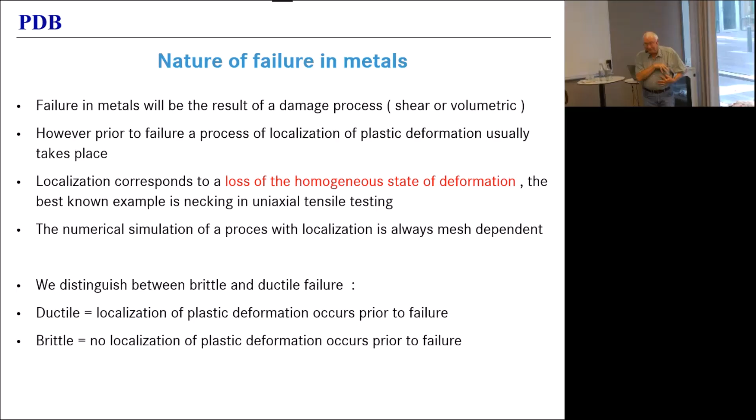80% of the problems you're going to have in your life are battery related. Not saying we should get rid of batteries. I didn't say that. Where was I?

Failure in metals will always be the result of some damage process. But prior to that failure, we will usually see a process of localization of plastic deformation. That means we lose the homogeneous state of deformation; we localize plastic deformation in a small area. And that localization, when we simulate it, will inevitably be mesh dependent, which is why we need regularization.

Now, we usually distinguish between brittle and ductile failure. Ductile failure means that you localize prior to failure, and that means you will have to regularize. Brittle failure, in my terminology, is that there is no localization prior to failure. So you break before your neck, and then there is no need for regularization. Now, the important thing we're going to try to convey today is that brittle and ductile are not material properties. Any material is brittle and ductile depending on the state of stress to which it is subjected, and it will have to be treated accordingly.

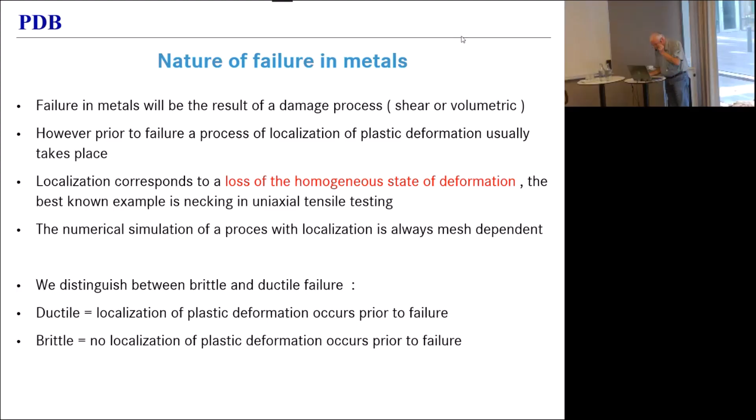So what happens when we localize? Well, when we localize, there is inevitably what I call an instability. You see a negative slope in the force displacement curve, so you get a negative stiffness. I call that an instability, not everybody does.

So there are two different kinds, because the force is equal to the true stress times the cross-section. You can either have an increasing true stress with displacement and a decreasing cross-section — that's what we call a structural instability. Or you can have the reverse: an increasing or constant cross-section with a decreasing true stress, which is a softening, and that would be a material instability. An example of the first is necking. An example of the second is a shear band.

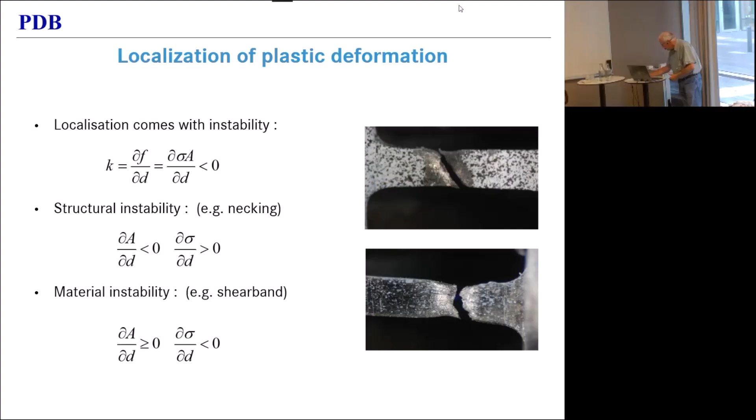Now, not everybody calls it instability. If we look at necking, and in particular diffuse necking in a metal, people will usually identify that with a loss of uniqueness. And clearly, if you look at the force displacement curve for a tensile test on a piece of steel, the necking starts at the maximum. Once you are beyond necking, for a given force you match two displacements, so you lose the uniqueness of your solution. At the very minimum, when you do an implicit solution, that may cause problems.

Now, the term instability will often be reserved for material instabilities, and that could be adiabatic shear bands, PLC effects, material softening — it could be many things. I don't distinguish. Loss of uniqueness is bad enough. The point is, you become mesh dependent. So it's very important to know when it starts.

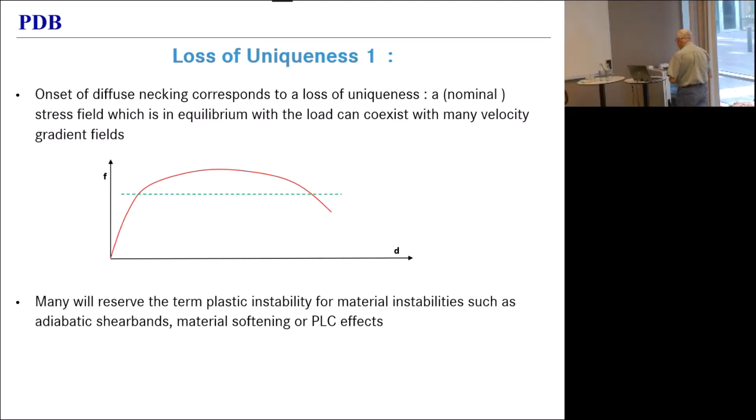Well, if you have a very nasty, difficult question, you can always ask Sir Rodney Hill, or at least you could, as long as he was alive. If you go back to the literature, in 1956 he published a paper which actually gives a mathematical criterion for the onset of localization of plastic strain, which he identified with the loss of uniqueness of the mechanical problem. But if you look at the formulas there's an integral, and that integral goes over the entire domain. So it's a global criterion that depends on the material law, on the boundary conditions, and on the geometry of your structure.

It's not something that you can evaluate at the level of the integration point, so for implementation in a code, it's maybe not very practical. Now, note that he published that paper in 1956 — that's the year I was born. That's why I didn't read it. I was too young.

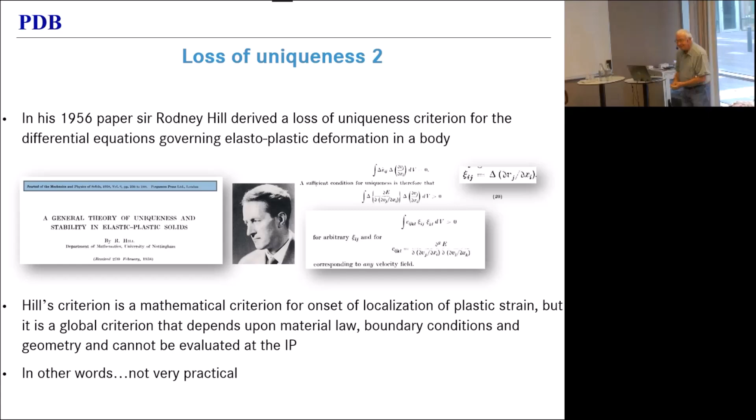Let's focus on necking a little bit. What is going on in a piece of steel that we subject to a tensile test? Well, you can actually distinguish four phases. Initially, you have homogeneous deformation. Then you have what we call diffuse necking, which is essentially a reduction in width of the sample. And then you have localized necking, which is what metal forming people are interested in, where you get extreme thinning in a narrow, skewed band through the sample.

That will then ultimately lead to fracture. Now, the criterion for the onset of diffuse necking has been known since 1885. It was Considère who identified it with the maximum of the force displacement curve, or to put it differently, the maximum of the engineering stress, engineering strain curve. Again, Rodney Hill identified the start of localized necking as the point where the second principal strain stops growing as the first principal strain is further increased. At that point, the only thing your material can do is thin, and obviously the process accelerates very rapidly from there on.

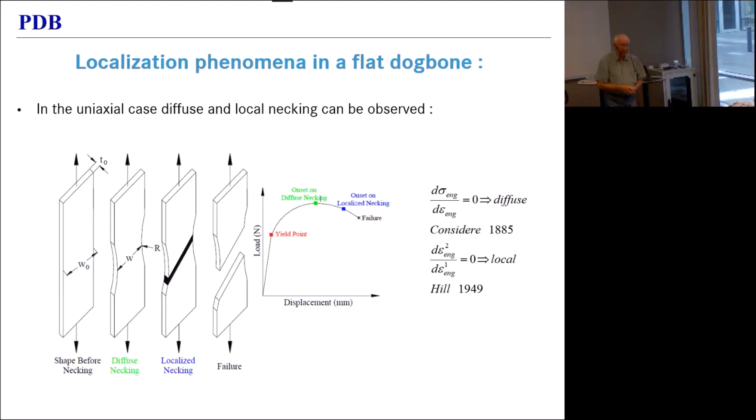Now we can look at that in terms of yield curves. The condition that you have a maximum in the force displacement curve is the same as saying that the tangent modulus is equal to the true stress.

If we then neglect the elastic strains, we can say for metals with a good approximation that diffuse necking starts when the hardening modulus, the derivative of the yield stress with respect to the equivalent plastic strain, becomes equal to the yield strength. And if you then throw a very simple equation at the yield curve, like the Ludwik equation,

yield stress is equal to K equivalent plastic strain to the power of N, and you do two lines of algebra, you find that diffuse necking starts for an equivalent plastic strain equal to N, N being the hardening exponent. Now, with an additional two more lines of algebra, you find that local necking starts at 2N. So it's quite far away.

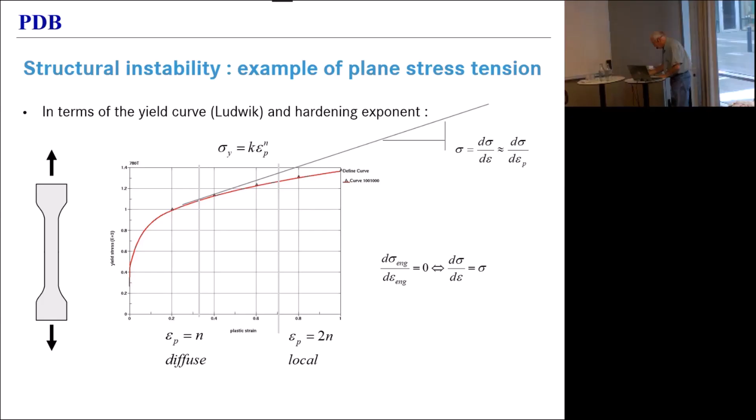A little bit more of a closer look at that, because it's all important in the end in terms of states of stress. As long as we have uniform deformation, we have a uniaxial state of stress, and we could actually easily simulate a tensile test with a single element. But then when we start necking, our state of stress changes.

It becomes two-dimensional, and at that point we need a shell mesh to adequately model what is going on. Finally, when we have local necking, we not only have width gradients in the sample, which cause a transversal stress, but we also have thickness gradients, which cause the stress in the thickness direction. So at that point, the problem becomes three-dimensional, and we theoretically need solids to model it.

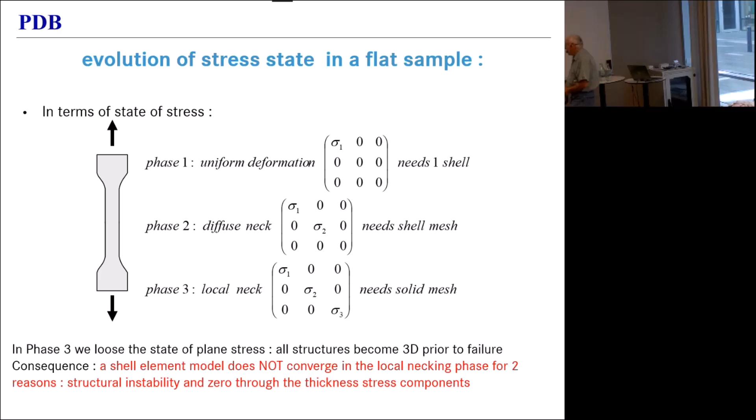Well, that's all very good. We don't do that in practice. We use shells. But that, of course, contributes to the problem of mesh dependency, because once we start to see a local neck, we not only see mesh dependency, but we enhance the localization because there is a component of the resistance of the material, the through-thickness stress, that is missing in our model. Now, that's not a cause of the issue, it just makes it worse.

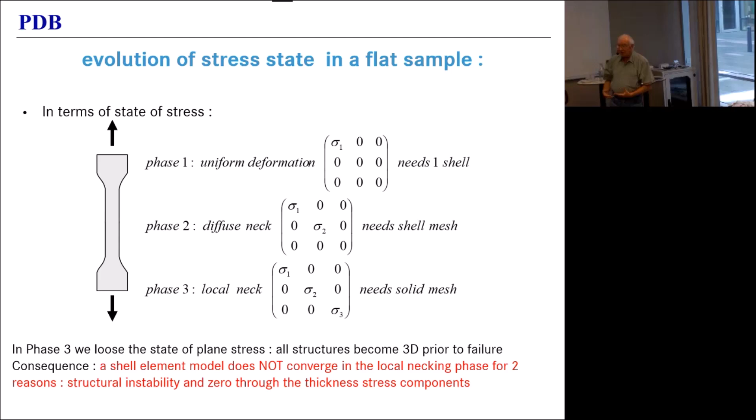So I now come to mesh dependence. I apologize for the simplicity of this example, but I have to make sure I get rid of the last bit of doubt about the fact that there is mesh dependency once you reach diffuse necking.

Imagine the extremely simplified case of a rigid, perfectly plastic material. So you have a Young's modulus that goes to infinity, and you have a constant yield stress. When do we start necking here? For which plastic strain do we start necking? Well, it's immediate. You start at 0 because your hardening modulus, which is 0, is smaller than your yield strength. And that happens immediately. So the moment you load, you're going to localize.

This case is actually so extreme that you can try it out in OpenRadioss if you don't believe me. But all the plastic strain will localize in a single element.

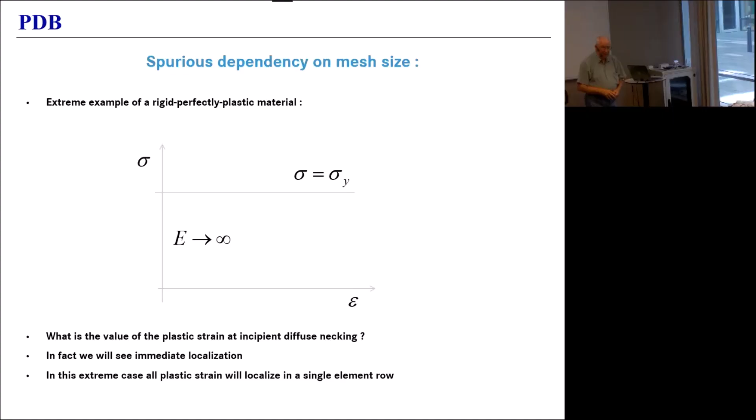Now let's assume that I can put my hands on some of that material and I do a tensile test on it. And I have a sample with an initial length L0, and a final length L at which that sample fractures. And now let's assume that I'm a professor at Chalmers, which I'm not, but we will assume that for just a moment. And I asked one of my students to work out the strain to failure, knowing the final length of the sample when it fails.

And the first student I ask is not the most studious. He models my sample with 2 elements. All the strain localizes in one of the 2. He looks at the maximum strain, which is in this element, and that strain is the logarithm of the final length of that element, which is the final length of the sample minus half the initial length of the sample, for the other element, divided by the initial length of the element, which is the initial length of the sample divided by 2. And he says, here is your answer.

So I'm not convinced. I ask a second student. He likes work more. He puts 4 elements. And he comes with a completely different answer.

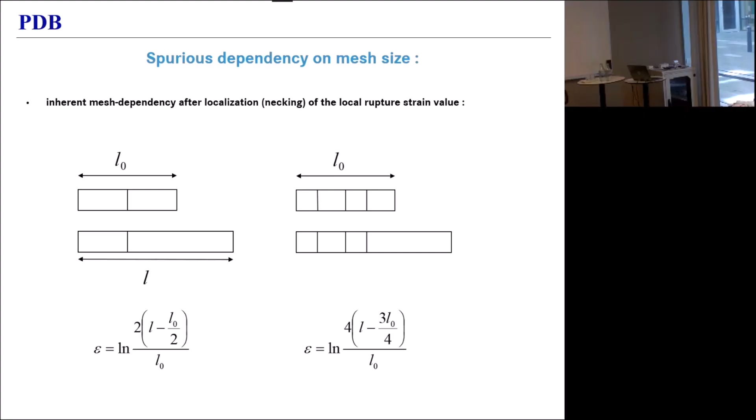Because once again, all the plastic strain, and there is no elastic strain, concentrates in a single element. So the strain in that element is the final length of the sample minus what is left in the other 2, which is 3/4 of the initial length, divided by the initial length of that critical element, which is the initial length of the sample divided by 4. Completely different number.

In general, if I have n elements over the length, I get that formula for the strain in the right upper corner. And there is no way that you can eliminate n from that formula.

But what you can do is reformulate the whole thing. You can say you have a global strain, which is the logarithm of the final length of the sample over the initial length of the sample, or the logarithm of the displacement over the initial length of the sample plus 1. And you have a local failure strain for which we have the formula in the right upper corner. Now I can get rid of n by replacing it with the element characteristic length, which is the length of the sample divided by n, the number of elements used for discretization. Then the local strain is the logarithm of displacement over element length plus 1, sample length, element length.

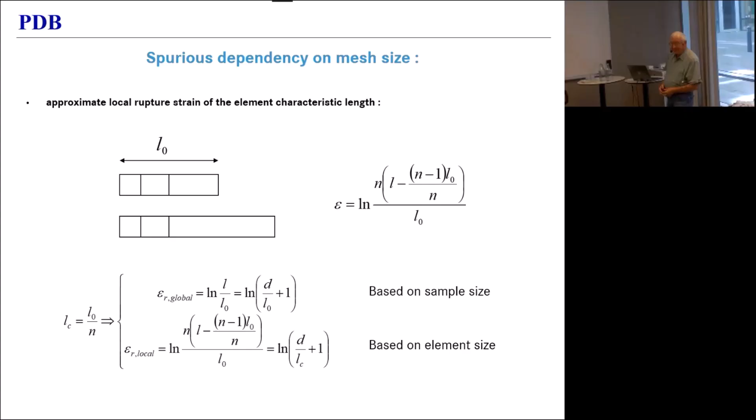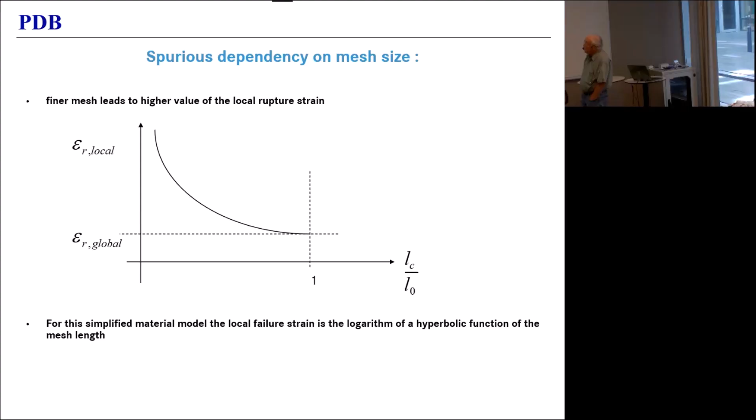It's extremely simple in this case because I'm using an extremely idealized material law. If you work it out, you get a regularization curve, a failure strain in function of the element size. For this very simple example, that regularization curve is a logarithm of a hyperbolic function of the mesh length. For real material laws, it will be something else, and you cannot derive it as simply as I just did. You'll have to determine it by simulation, step by step. But the principle is not different.

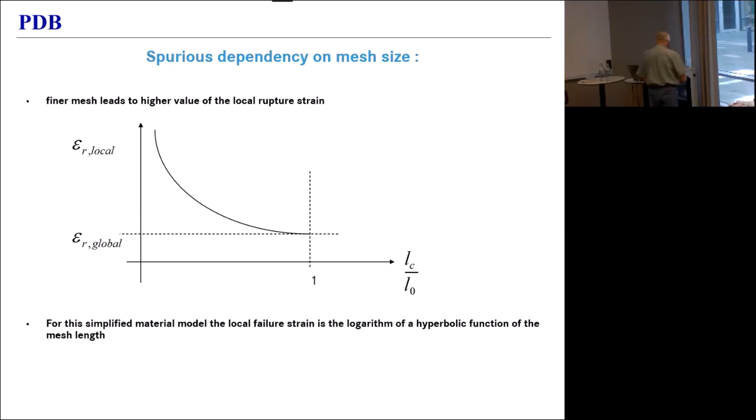This is the reason we absolutely need regularization when doing real applications, because your mesh in a real-life model is never homogeneous—you always have a mixture of small and larger elements. Without regularization, the failure pattern will actually be dominated by the local element size rather than by the physics.

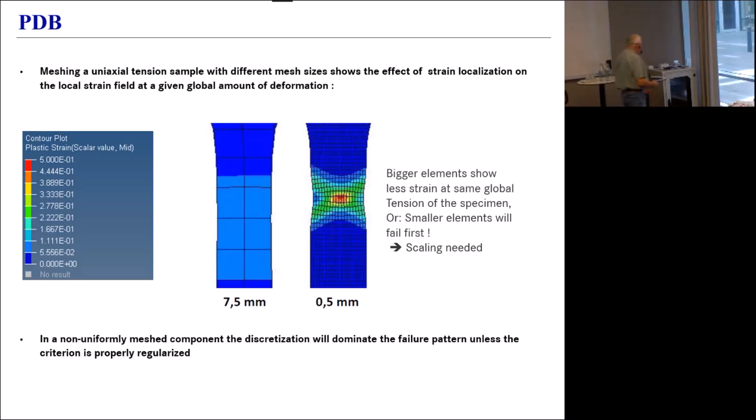So we did an example on Usibor 1500. We modeled a typical tensile test. Marian generated a biquad failure criterion and determined a regularization curve, basically a scale factor applied to the failure curve, where the failure curve is a function of triaxiality. That scale factor is 1 for a mesh length of 1, which happened to be the mesh size for which the material model was validated. As the mesh size becomes larger, we have to bring that scale factor down—and not just by a little bit. It goes down by about 30% in this moderately severe example.

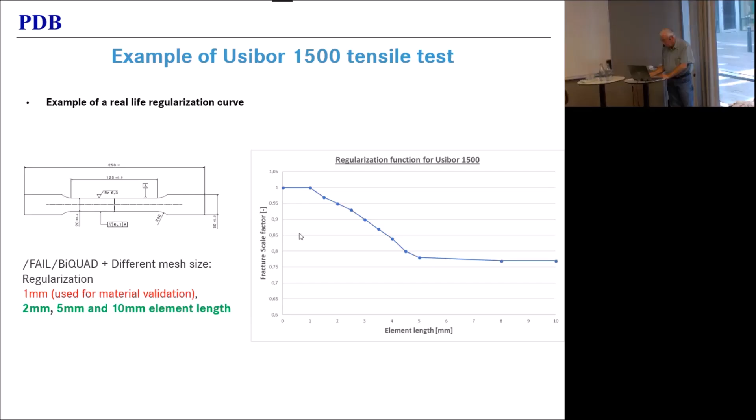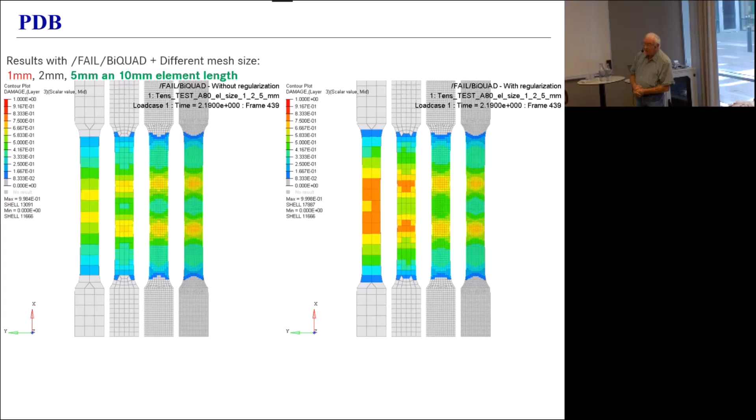We can take the time to look at the video. It's run with mesh sizes of 1, 2, 5, and 10 millimeters. There is regularization on the right-hand side—you will see them all fail at the same time. There is no regularization on the left-hand side—you will see them fail sequentially from left to right. The coarser the mesh, the later it fails.

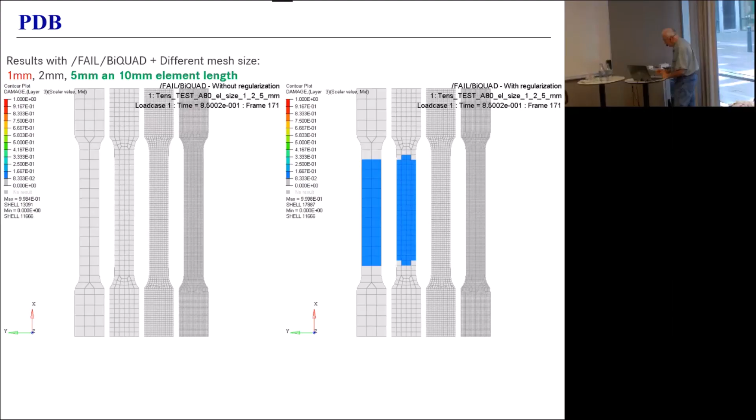We have some snapshots to confirm that. You see the initial failure here. With a 1 millimeter mesh, they are simultaneous—it doesn't matter whether you have regularization or not. With regularization, all meshes fail almost simultaneously. Without regularization, after the 1 millimeter comes the 2, quite a bit later comes the 5 millimeter mesh, and finally the 10.

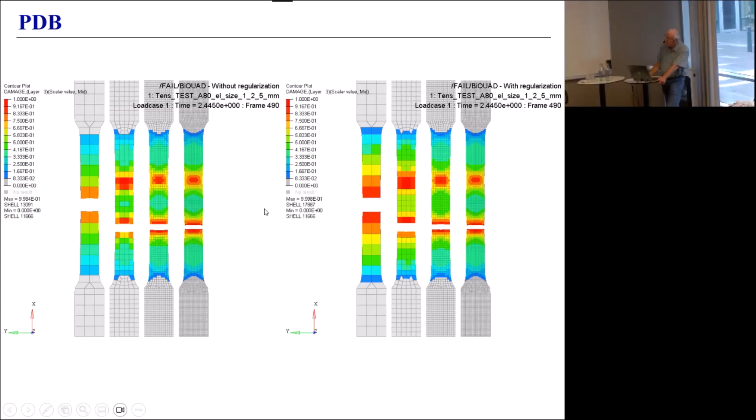What we regularize is the displacement at failure. You could choose to regularize many other quantities—you could focus on energy, or whatever. Obviously, the best would be if you could regularize the entire load path. There are methodologies that do that, but they require a bit more effort from the user than what I just showed. In the end, it's all a question of what payoff you're going to get for your efforts in a real-life application, and that has to be judged on a case-by-case basis.

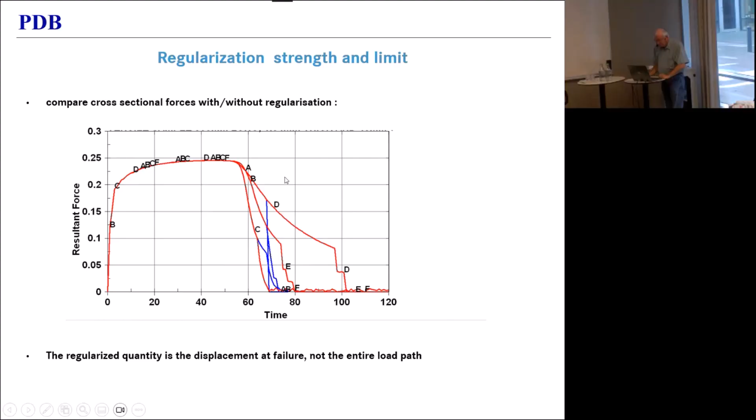So regularization works, at least in uniaxial tension. It works because in uniaxial tension there is no doubt that we have necking, that we have localization. That will be the case for the vast majority of metals, with the exception maybe of a few castings. But it's not always the case.

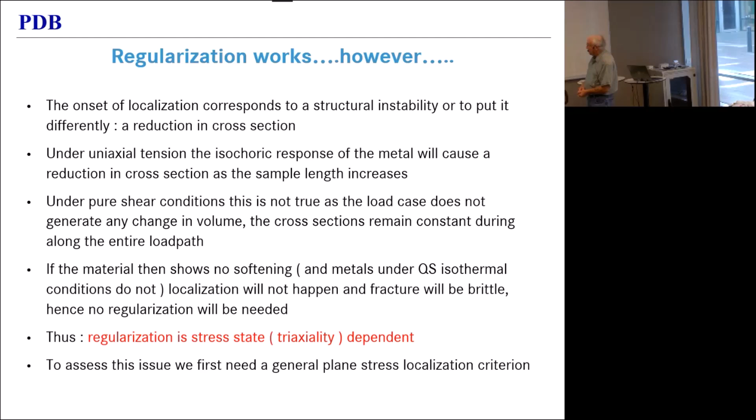Under pure shear conditions, we will not generate any change in volume, we will not generate any change in cross-section. And if the material has no softening—and metals under quasi-static isothermal conditions do not have any softening—then there will be no localization. And to regularize your failure model will be extremely misleading.

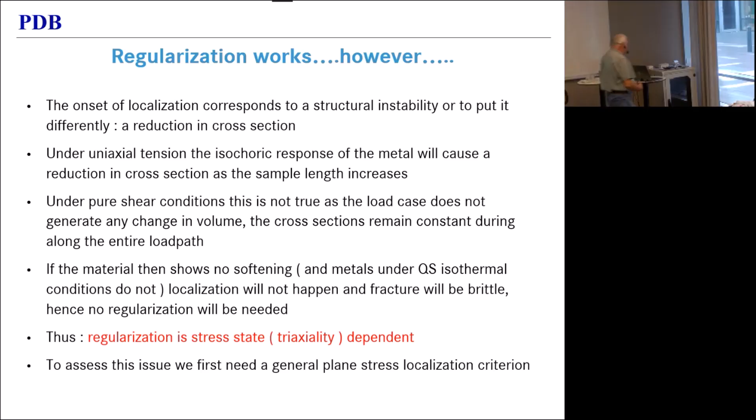In other words, regularization is stress state, or triaxiality, dependent. And there is a dramatic example of that in the next slide.

You see a part here of a component in a full car simulation. On the top you see a deformed shape, and the red dots in the middle and right-hand side plots are eroded elements. You see a buckling mode of that extrusion profile, and you see a moderate amount of failure. In that simulation we had no regularization, and it behaved perfectly.

With regularization, you get the nonsense that you see on the lower row. Massive amounts of erosion, way too much failure, and basically a shear off of the top plate from the rest of the profile. It opens like a can of sardines. That's not what happened. That's not what happened at all.

The reason for that is that we had a failure model calibrated for a 1 millimeter mesh. In the application, we had a 4 millimeter mesh. It was regularized based on uniaxial tension. You apply that regularization to a state of shear, and you fail way too early. You get a time bomb.

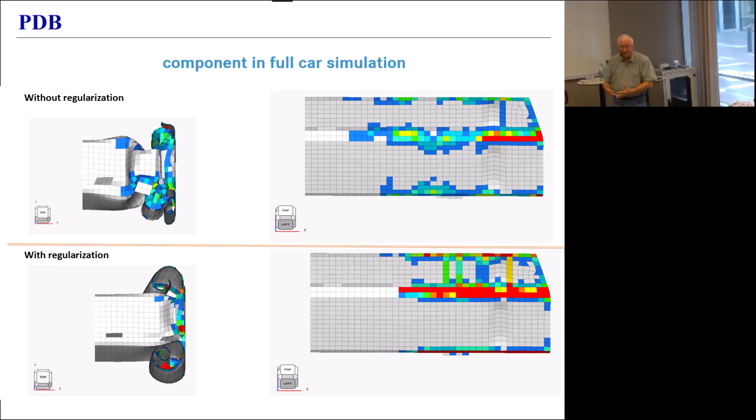So we're going to have to make our regularization stress state dependent. But for that, I'm going to have to know when localization starts under biaxial loads, under shear loads—when does localization start for a given value of the triaxiality?

Well, if we limit ourselves to plane states of stress, that's a question that's been answered by this guy, Herbert Walker Swift, who wrote a paper in 1952, so I was not born yet. I certainly didn't read that one until much, much later. But at least I didn't reinvent the wheel—whatever was there, I used.

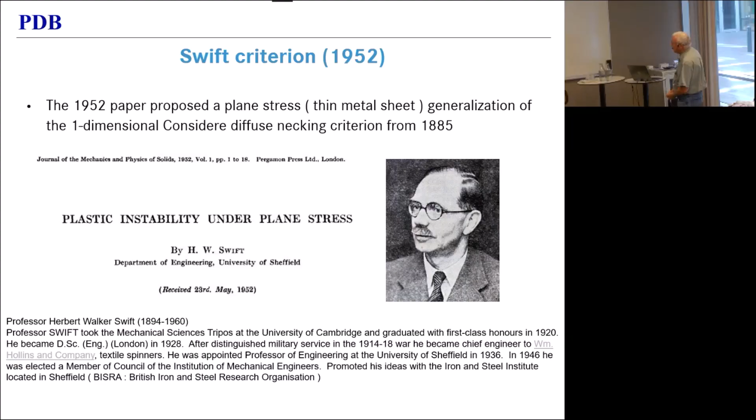I'm going to briefly walk you through the Swift criterion and what we can do with it. It's really quite simple. First, you have to prepare some notations. He was looking at plane stress conditions.

And in fact, he was looking at biaxial tension, so two principal stresses that are both in plane and both positive. Then you can write a stress tensor as the first principal stress multiplied by a matrix where we have a 1 in the 1,1 component, a value A in the 2,2 component, and 0 for all the others. That factor A is the ratio of the second principal stress to the first.

And if you work it out, you can calculate the triaxiality, which is pressure over von Mises stress, and you see that that is a function of A. So this A contains the same information as the stress triaxiality—you can identify it with a state of stress.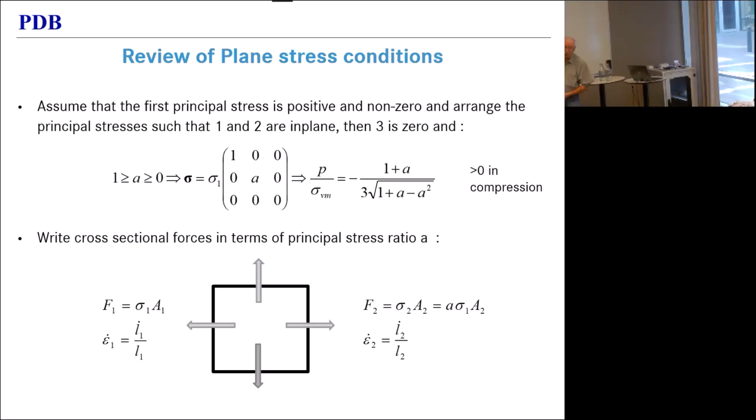To get to the simplest example: if A is 0, you have uniaxial tension. If A is -1, you have pure shear. And if A is +1, you have equibiaxial tension.

So this is then what he considered. You take a sample, you load it in tension in two directions. In the first direction you have a force F1, in the second direction you have a force F2. You have strain rates epsilon.1 in the first direction, epsilon.2 in the second direction.

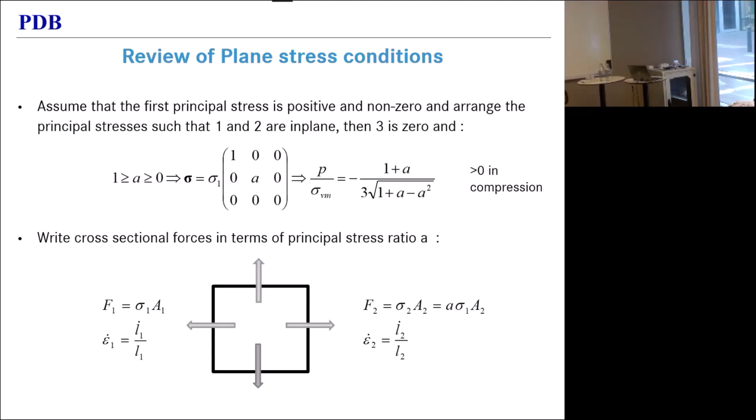Swift made a very simple assumption. I think nobody knows where it comes from—I don't think he knew. He just figured out that it somehow worked.

He made the assumption that in the two directions, we simultaneously reach a force maximum—so we reach a state where dF1 and dF2 are simultaneously 0, which is a straightforward generalization of the Considère criterion. The only thing I can say is don't think about it too much, because the only thing you'll get from that is a headache. Believe me, I tried it.

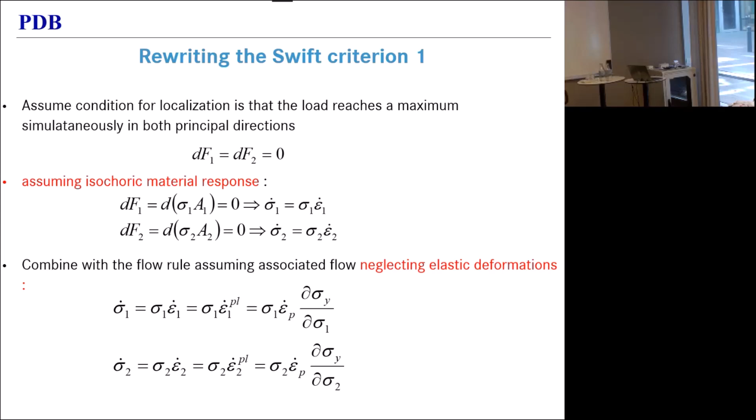Well, you work that out. You assume that your material response is isochoric, and your conditions translate into two differential equations for the stress rate in function of the stress and the strain rate in the corresponding direction. You then neglect the elastic deformations, identify the total strain rate with plastic strain rate, and replace the plastic strain rate by the flow rule—so by the equivalent plastic strain rate and the derivative of the yield stress, or the von Mises stress, which you can use interchangeably with respect to the corresponding principal stress component.

The last thing you have to add are the classical plastic loading conditions, where we say that we're in a condition where the yield stress is equal to the von Mises stress. And you have to add the same thing with a dot, showing that we're actually evolving in a way that we stay on the yield surface. It then takes about one page of algebra, not very big, to derive the condition that expresses that simultaneous equilibrium of the two forces.

What you end up with is that the tangent modulus, the derivative of the yield stress with respect to the equivalent plastic strain, the tangent to the yield curve, has to become equal to the yield stress multiplied by a function of the state of stress, and to be more precise, by a function of that factor, A. Then we're going to have to solve that equation for every value of A and find for which value of the equivalent plastic strain it is fulfilled.

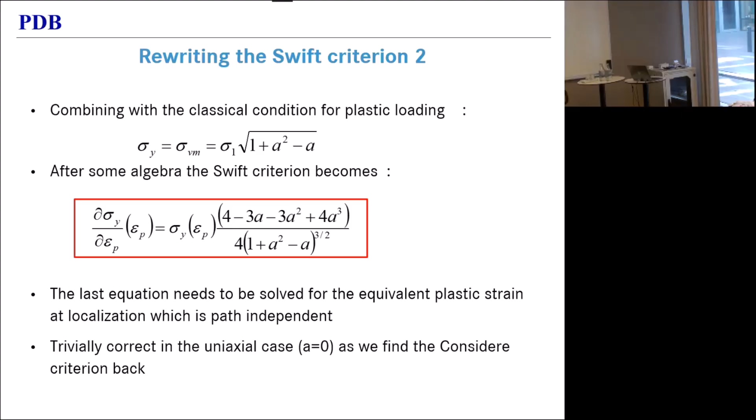Now you can immediately see that it's consistent. In the uniaxial case, when A is equal to 0, that whole multiplicative factor becomes unity, and you end up with the Considère criterion. So you fall back on something you know, you fall back on your feet.

Well, once you have that equation, you can use it. Given you have a yield curve for a certain material, that would be the red curve. You take the derivative of it, so you derive that yield curve with respect to the equivalent plastic strain. That would give you the green curve. Wherever these two curves intersect, that is the strain at necking.

That is the start of localization for a triaxiality of one third. If you now want to know the start of localization for any other state of stress, you compute the value of A. That gives you a multiplication factor for the red curve. You move your red curve up or down by that multiplication factor, and you look for the intersection point with the green curve, which you don't touch. And that gives you the value of equivalent plastic strain where localization starts for that particular state of stress.

So you can very easily implement that with Excel, which is, I think, what you did, Marin? Yeah.

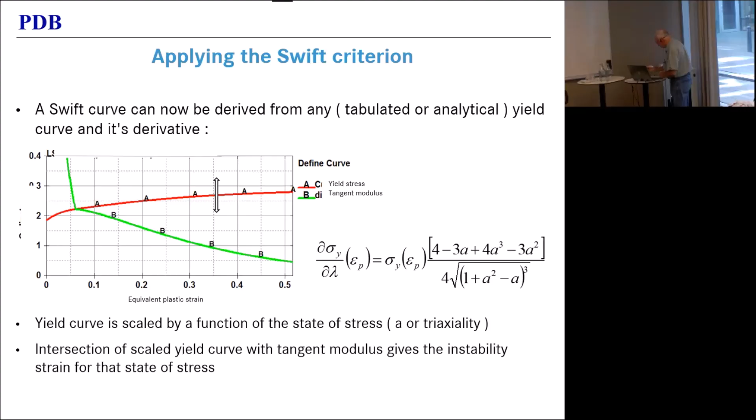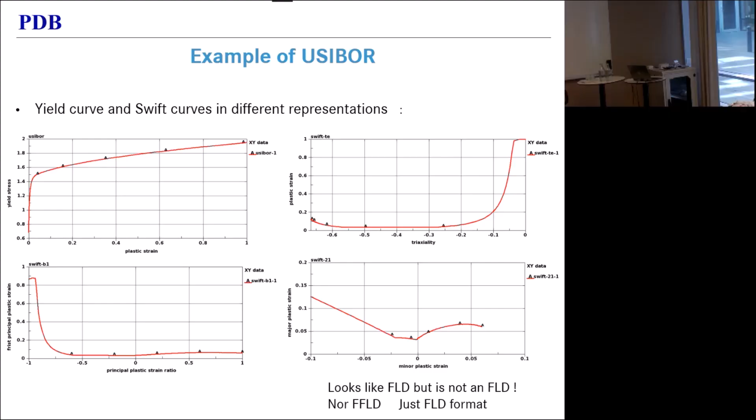You can transform that criterion as a function of other quantities. Maybe the most familiar one is here, where we plot the major plastic strain as a function of the minor, and then it looks like an FLD. It looks like a forming limit diagram, but it's not, of course. A forming limit diagram gives you the start, the onset of localized necking. And what we have here is the onset of diffuse necking.

So you're much lower. About a factor of 2.

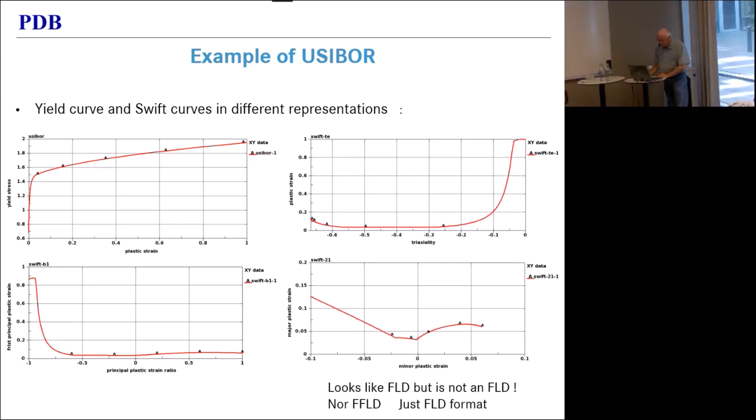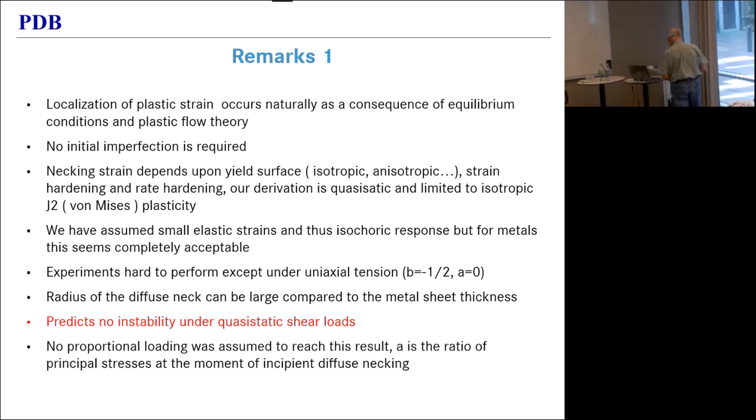Second set of remarks, you can generalize this as much as you want. We have written the equations for a 2D Swift, taking the elastic strains into account. We've done a 3D Swift assuming rigid plastic material, and a 3D Swift taking elastic strains into account. And you can even do it for compressible materials, so you can do it for plasticity theories that allow permanent volumetric straining, materials that have a plastic Poisson coefficient that is not equal to 0.5. And we're going to implement all that, right, Marion?

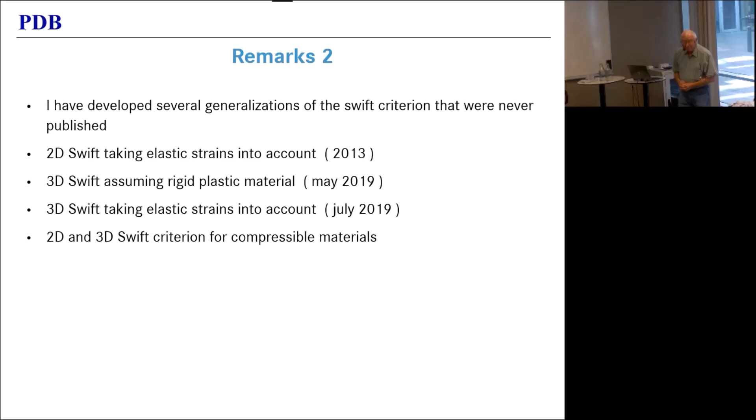Finally, why Swift? There are many other 2D localization criteria. If you look at the literature, you have the global bifurcation criterion, the limit point bifurcation criterion, the maximum force criterion, the Belytschko and Xu criterion. Why did we pick Swift?

Well, number one, it's very simple. Number two, as long as the material is not rate dependent—and these things become very complicated once you consider rate dependency—but as long as it's not rate dependent, we could prove that it gives the same results as the limit point bifurcation criterion, which is much more complex and has a much more solid mathematical foundation. But the main reason is that we tested it.

You can't really test it experimentally, but you can test it numerically. Numerically, you can build test cases where you take a plate of finite elements and subject it to loads with any triaxiality, and check when localization starts. We've done that for about 100 data points, and the start of localization was always spot on the Swift prediction. So it works out amazingly good.

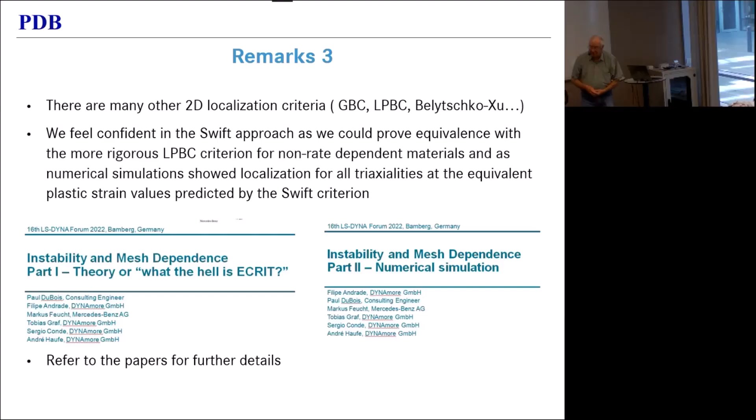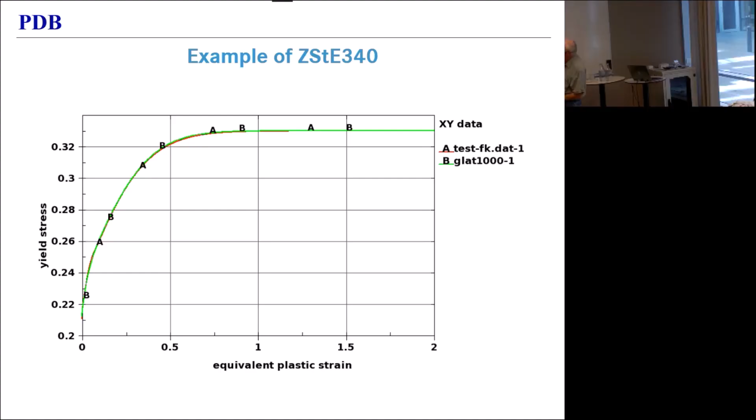One pitfall: you need smooth yield curves, and you need very smooth yield curves. You don't always see that you have a problem. You see 2 yield curves here for an HSLA, a high-strength low alloy steel. The red one is the original, the green one is the smoothed one. They look the same in this picture, but they're not.

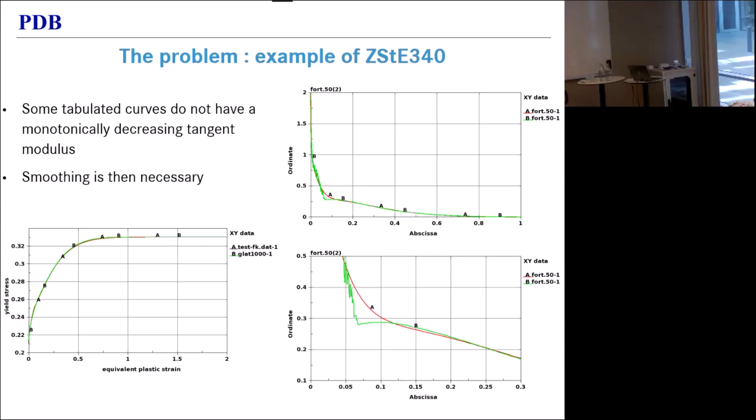If you actually look at the derivative, shown in the upper right corner with a zoom in the lower right corner, you see that the original tangent was not even monotonically decreasing. We had some oscillations and a slight increase. With the smoothed version of the yield curve, that pathological behavior disappeared.

The result of that was that with the initial non-smoothed curve, we got this instability curve with a dip in it. If you get that, it's obviously suspect, but you're not sure if it's wrong.

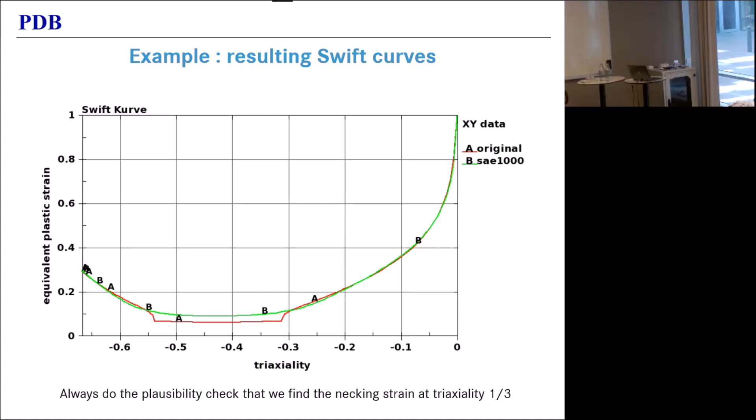But you can very easily verify, because for a triaxiality of 1/3 you know the necking strain. So you can check if you have the right value, and if you don't, there's something wrong. With the smoothed curve, we got the green curve, which not only looks better but has the right value for uniaxial tension. So it is very sensitive to the smoothness of the yield curve, and you have to make sure you don't generate nonsense there.

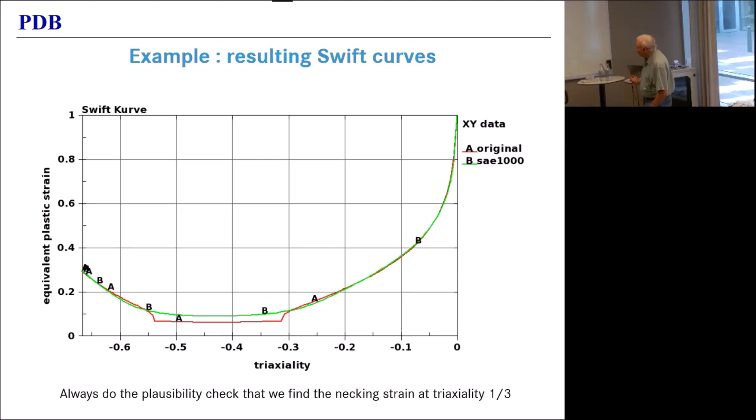Well, I finally come to what we did. We somehow have to come up with a regularization that is triaxiality dependent. We can determine a regularization curve for uniaxial tension—we're not going to escape that, we will always have to do that.

And we know that under pure shear, we don't have to regularize at all. But what do we do for other triaxialities? Well, the idea is to make the remedy proportional to the disease—that's what medical doctors do, right? You have a cold, they give you a little penicillin; you have the flu, they give you a little more. We're at the same level here.

The mesh dependency will depend on the localization, on the plastic deformation that we see beyond the onset of localization. So we're going to take our failure criterion, which gives us a plastic strain at failure, and the instability criterion, which gives us the onset of localization. When we subtract one from the other, we have the ductile plastic deformation—the part of the plastic deformation that is problematic in the sense that it causes mesh dependency.

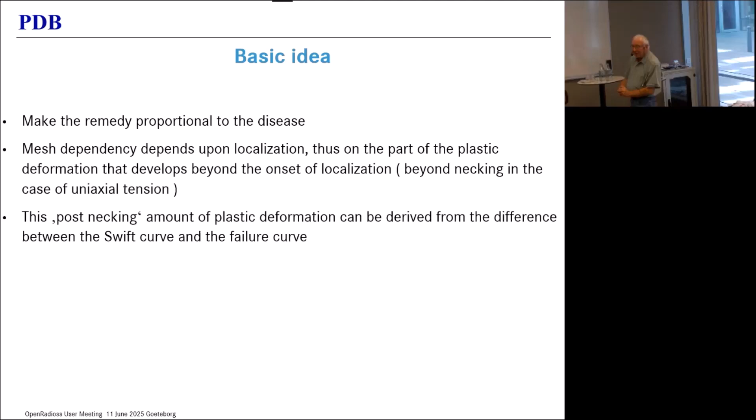So that's a very simple process. In step one, we take our yield curve and take the derivative. We have to smooth that out a little bit.

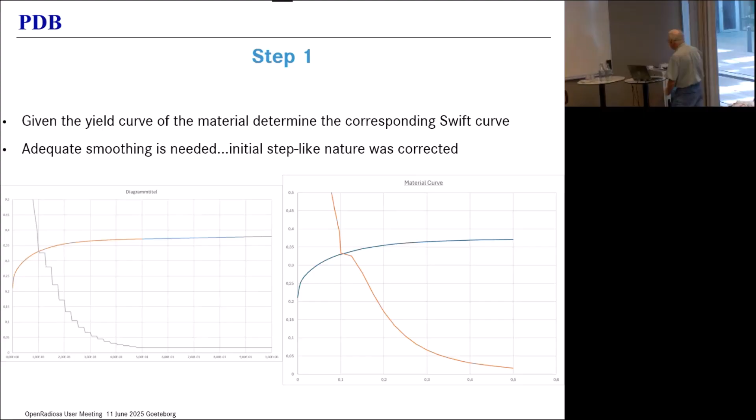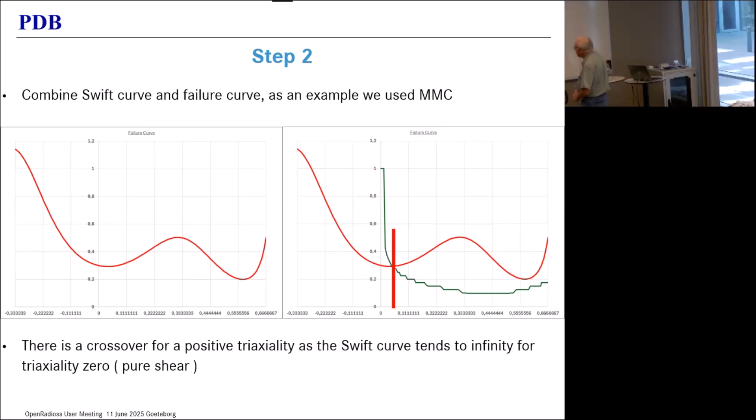In step two, we compute, with the process previously described, the instability curve, which is the green one. We have to smooth that one out a little too. And we combine that with the failure criterion, which can be anything—it's the red curve here. In this case it was a modified Mohr-Coulomb, but it could be anything, something tabulated from experiments, wherever you get your failure criterion from.

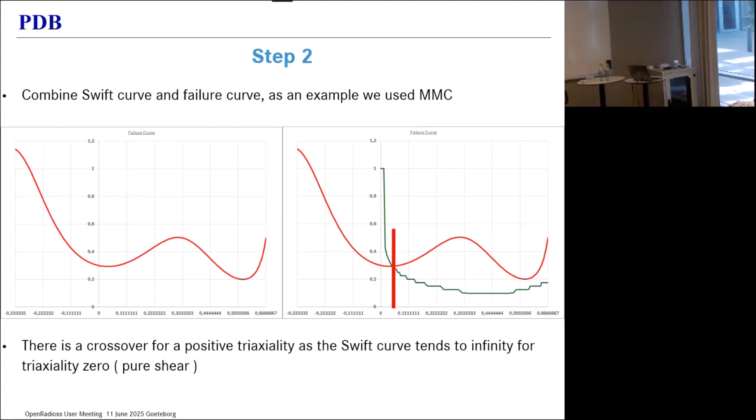You see that the two curves cross over for some positive triaxiality—now my triaxialities are positive in tension the way they should be. As long as the instability curve is above the failure curve, we don't have to regularize, so we're fine. When the failure curve is above the instability curve, we have to regularize, so we're going to subtract one from the other.

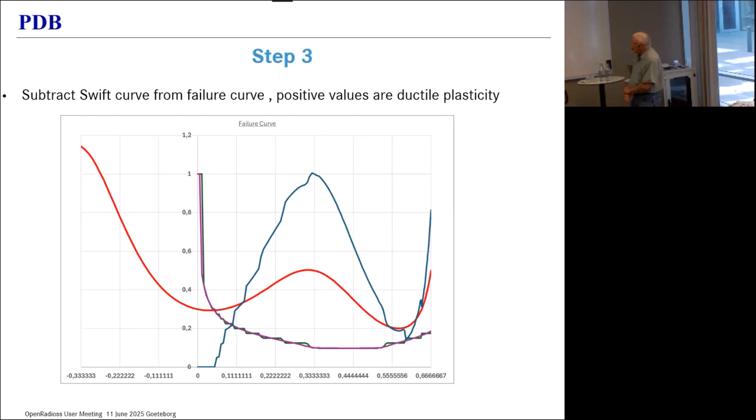And we've done that here. Obviously, the value of that subtraction is 0 at the intersection point, and when we get a negative value, we set it to 0. Sometimes we have two intersection points—there could be a second one in the neighborhood of equibiaxial tension. That did not happen for this particular material.

So the blue curve is a normalized measure for the ductile plastic deformation, the amount of plastic deformation that will give rise to mesh dependency. And we've normalized it here for a triaxiality of 1/3, to a value of 1.

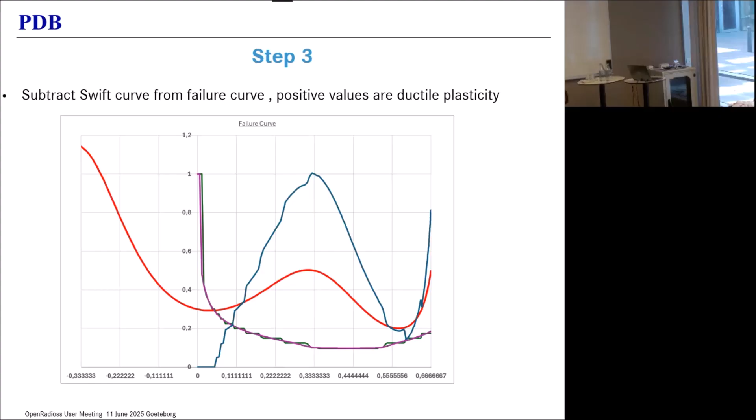We now generate a regularization function for every triaxiality, using linear interpolation. For every triaxiality, we compute failure strain minus Swift strain, and divide that by failure strain minus Swift strain for a triaxiality of 1/3. We cut the value at 0, which gives us a factor alpha.

Then we interpolate between the regularization function at a triaxiality of 1/3, which is the blue curve, and a unit curve, which is no regularization at all — used to the left of the intersection point, just a horizontal unit function. Doing that, we get a regularization function for every triaxiality.

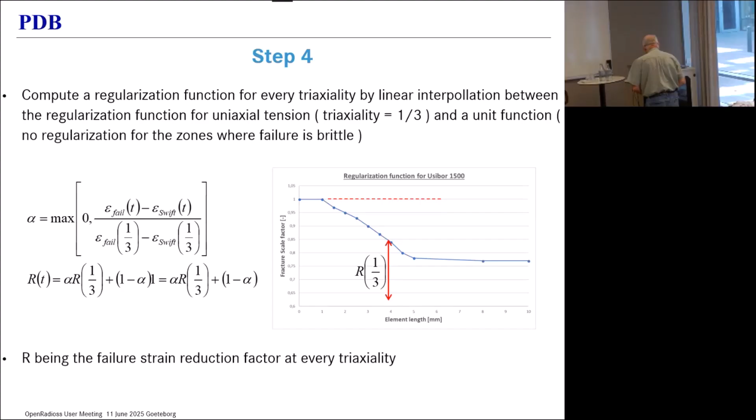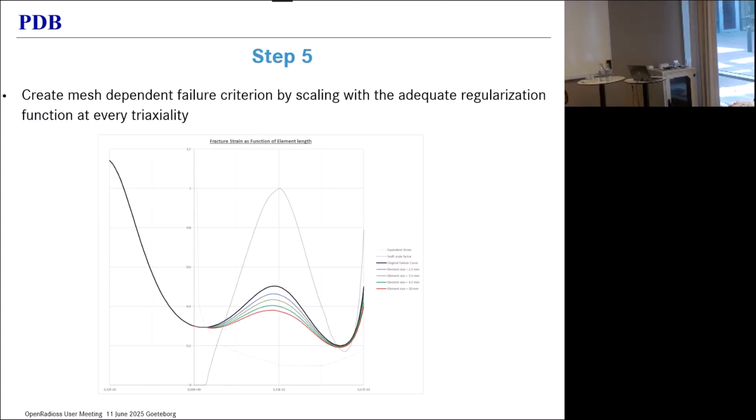So we've done some single element test verification. That's actually very elementary, and it just shows that the implementation works. I'm not going to go into that — we've done our homework.

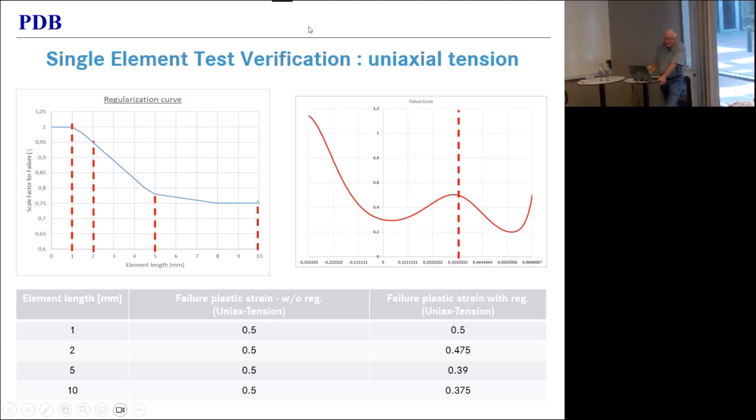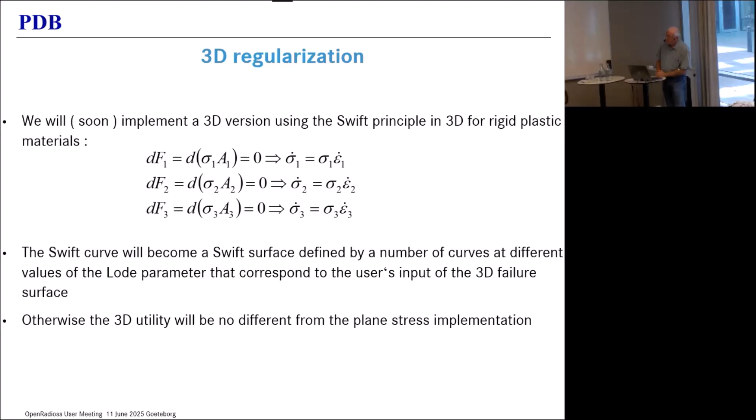That means the Swift curve will become a Swift surface defined by a number of curves at different values of the Lode parameter. So we just have to generate one for every Lode parameter at which we have a failure curve, and then combine them one by one in exactly the same way as you just saw. Although the equations are somewhat more complicated, that will be a pretty straightforward process.

So these are the conclusions. Regularization of failure criteria is a necessary evil. If you have a ductile material, you have to do it. I've had many customers say they hate it so much it should be illegal. Well, my answer to that is: I hate paying taxes, but I pay them. If you live in the United States, you pay.

So it's not an option, it's not disputable. The amount of regularization you need depends highly on the triaxiality of the load path, and in the case of brittle failure — for instance, pure shear under quasi-static conditions — it becomes 0. We've implemented something very pragmatic that is triaxiality dependent. For the moment, it's limited to plane stress.

The beauty is it requires no user intervention. You don't have to do anything. All you need to do is get a regularization curve for uniaxial tension. So there is no additional work beyond what you already do.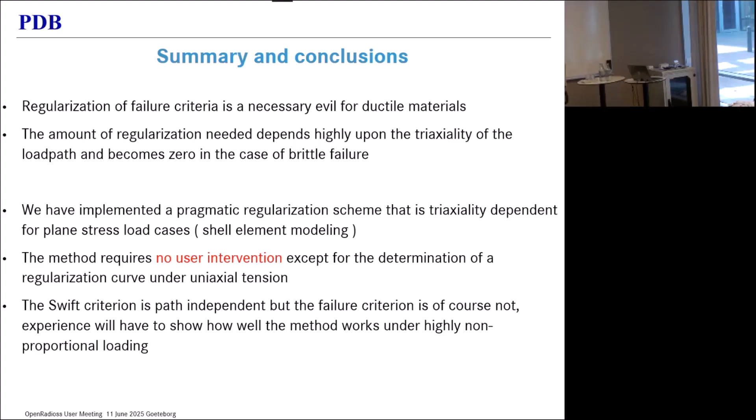Now, is it perfect? Of course not. Nothing is perfect. The Swift criterion is actually path independent, but the failure criterion is not — we know that failure is quite path dependent. So we're combining something path independent with something path dependent. As long as you do proportional loading, it works, of course. But under highly non-proportional loading, application and experience will show.

That's it. I've made a habit of coming to the OpenRadioss users conference every year, and I've made a habit of dedicating my last slide to the city in which the conference takes place.

The first time I came to Gothenburg was 1985. And it is, of course, the city of Starköl, Absinthe, and Surströmming — all 3 of which I have enjoyed to a high degree, many, many times, so I have tremendously good memories of this city.